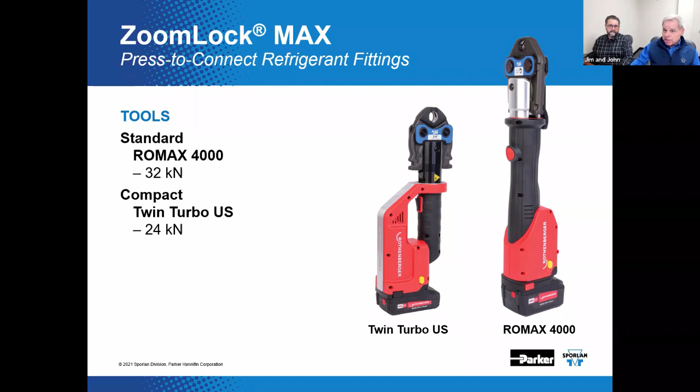Yeah. And as far as I know, Sporlan is providing these press tools. We maybe even have them in stock. We did. While we recommend utilizing the Rothenberger tools and jaws with the ZoomLock Max fittings, the jaws are available and compatible with a wide array of standard and compact crimping tools.

Now, if you're reading ahead over here, you'll notice that there's no crimp gauge required. How do we get away with that, John? No crimp gauge? We get away with no crimp gauge by having extensively tested the product, extensively validated the product and the crimping jaws, and proving that we do not need to gauge these. Wow. Well, that's a time saver there in and by itself.

Now look at this. We have the backing and the support of 60 plus professional sales and application people across North America. You know, some of those folks are even people that I've trained. That's kind of scary. Yeah. It is. That's scary. And you got to love this 10-year warranty.

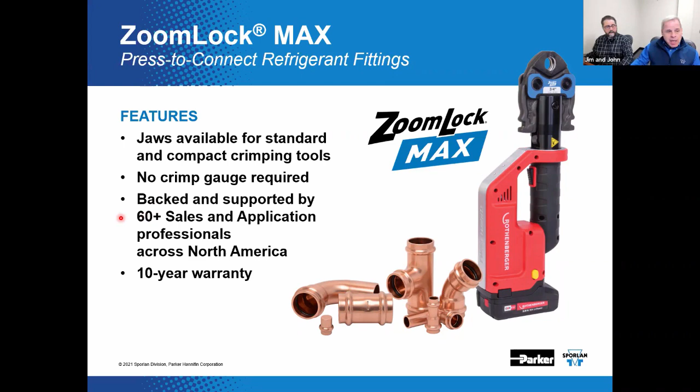Here's a new product that we're promoting as well, the ZoomLock Push to Connect refrigerant fitting. These are really quick and handy. You don't need a fancy, expensive tool to put them together. You just push them together. Push them together and they're connected. And again, as with the ZoomLock Max, there's no brazing, no flame, no hot work permit, and there's no need to nitrogen purge because you didn't burn it all to hell in the first place.

That's right. We have that same sales force supporting these products as well. And look at this. These are rated clear up to 870 PSI. That's pretty impressive. I've heard it's the configuration and the thickness of the brass and the incorporation of the grab ring that helps to gain that rating. That's correct. And John, are these UL listed?

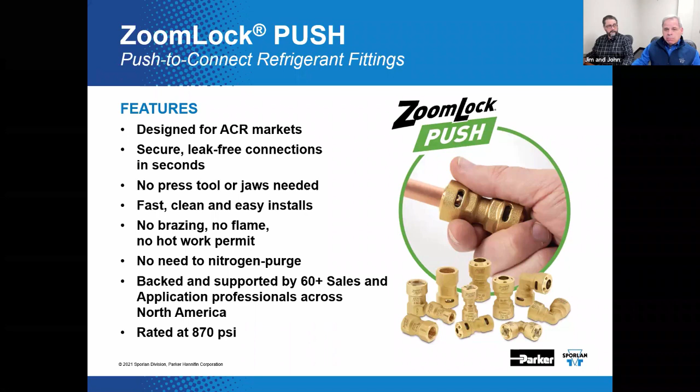Now, there's a 410A optimized designed version. We say it's non-removable and it's suitable for not only 410A, but a number of other refrigerants. It's got that 10-year warranty. And there's something about maybe you don't want to put a finger inside of here, or any other body part for that matter. Probably be advisable not to do anything like that. Yes. No, that's probably bad.

Now, we also have a so-called removable version. Boy, say that fast 3 times, removable version. I don't think I can do that. That's got a double O-ring in it. And apparently you can pull the little booger apart. They can be disassembled. How would you do that, John?

Well, we actually offer a nice little take apart tool. If you can see that, you get this little key set with these pull it apart tools. Refer to them as wrenches, though they're not really a wrench. They're just a release tool. Hey, yeah, it works. And so we're showing that you can buy those from us. Indeed. 10-year warranty here, 5-year warranty on this one.

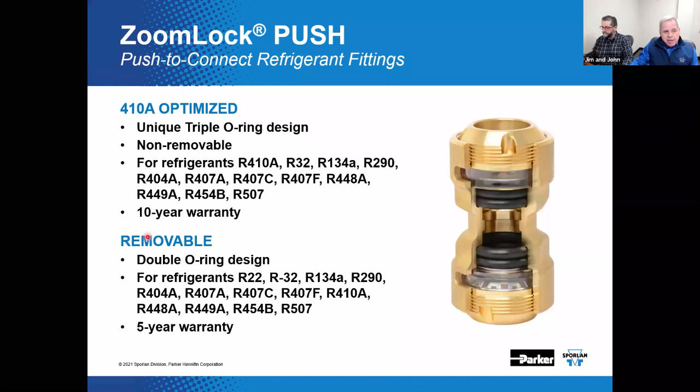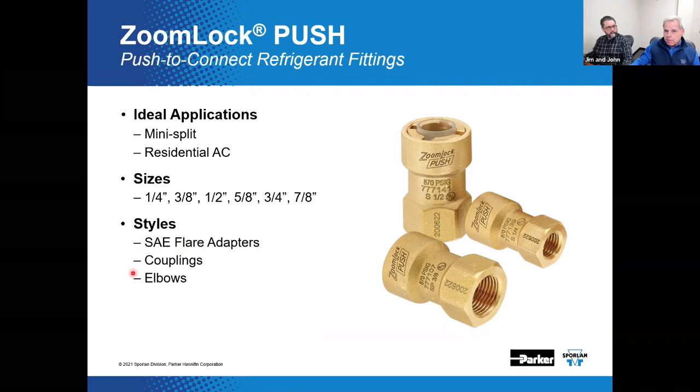And here's where these guys really come into play. MiniSplits, which are really susceptible to debris that could develop during installation. Correct. This helps to eliminate that. Residential AC, quick, fast, and a whole host of sizes here, right, John? Right. All the sizes you should need for those types of applications. And the types. Right. SAE flare adapters, couplings, elbows. And as you pointed out, having cleanliness is extremely important for the MiniSplits. Very, very important. Absolutely. And I think they might even be in stock.

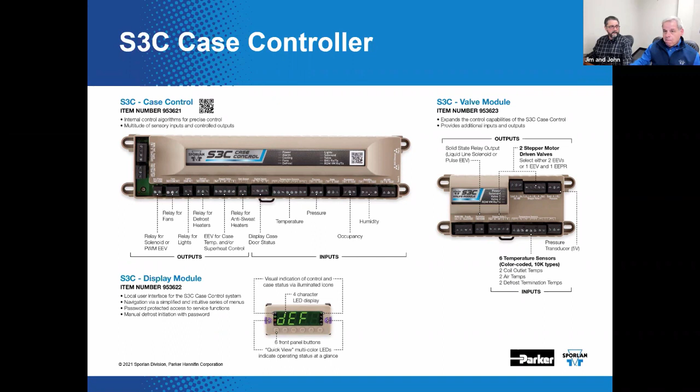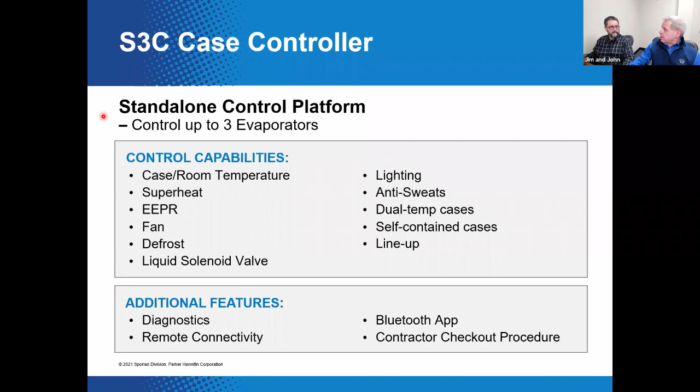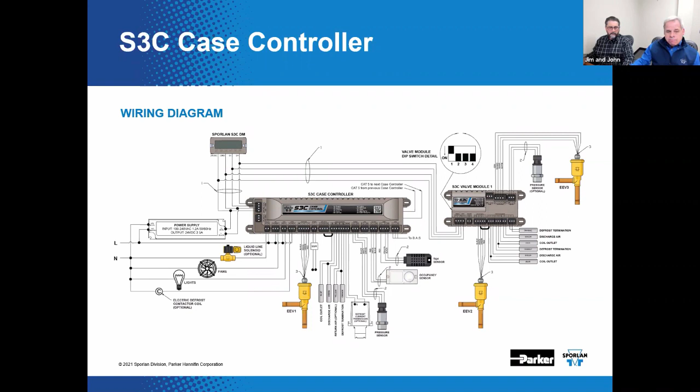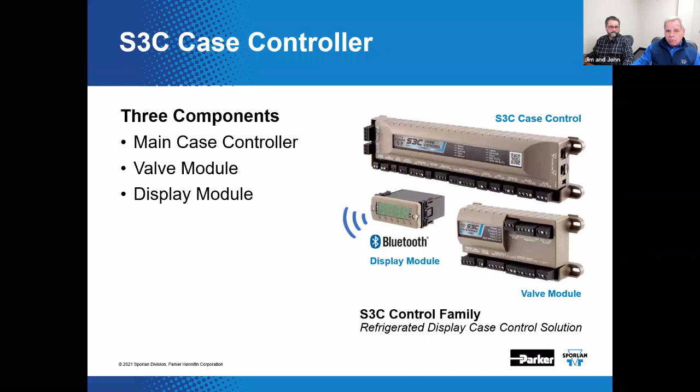Pretty neat. That's correct. And just a reminder, there's 3 components that comprise this complete package: the S3C case controller, the valve module, and the Bluetooth display module. Yep. Really neat. What the heck is this thing, John? And where do you get one? What does it do?

All right. So the reason for the Bluetooth is so that you don't have to go through and do all your function checks and setup through that little display module. You can, but you can also do it through a very intuitive app called Sporlan Tech Check, which is available for both Android and Apple devices. Oh, that's what this means. iOS and Android. Okay.

So where do you get this? You go to the Apple Store? Apple Store or the Google Play Store. So it'll talk to the S3C through the display module? Yep. Wow. Well, that's pretty neat.

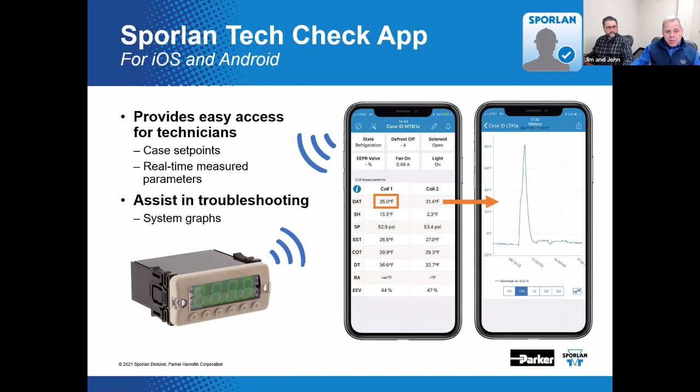This is slide 16, just so that Dennis knows.

Now, new product line. Modulating three-way valves, innovative solution to heat recovery and heat reclaim applications. Now, we've done this for a while, but we're expanding this product line in response to customer interest. We've increased the offerings to four different sizes. So we've got the 9 and the 17. Now we've got a 7 and the 21. Right. Expanding it both to the lower end and the upper end of the product range.

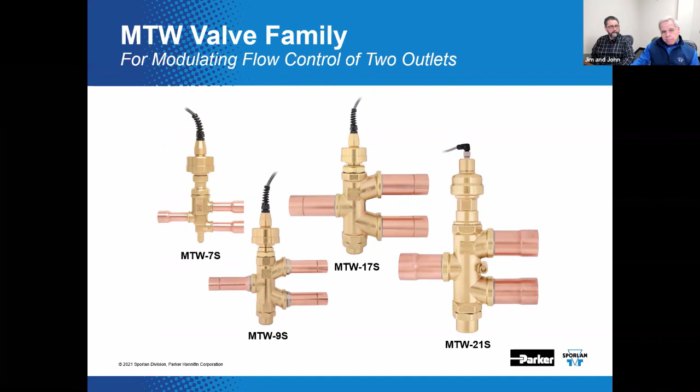And just so that you know, here's an example of how this valve could be incorporated into a vapor compression refrigeration system. Remember, there's 4 main components: the compressor, the condenser, evaporator, metering device, and then over here, here's where this modulating three-way valve could be utilized. Right. And then this is showing it connected to an interface board that's helping to tell it what to do.

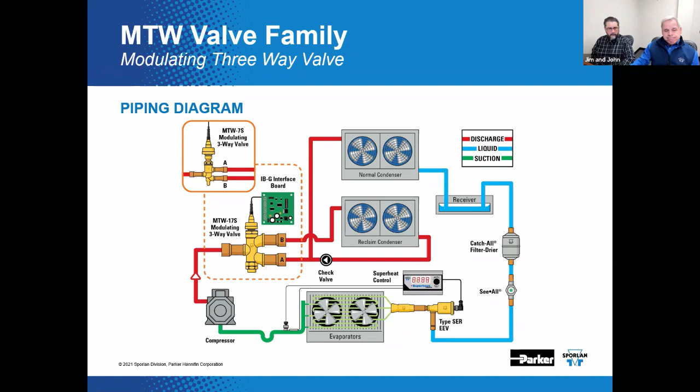These valves simplify applications and are ideal for modulating reheat or heat recovery. They're applications that we're seeing more interest in all the time. As an update to the product line, all sizes are now available in a serviceable form. Look at this. These things look like you can take them apart. Indeed, you can. The reduction in piping and controls and the complexity help customers implement modulating control in a more simple, compact way.

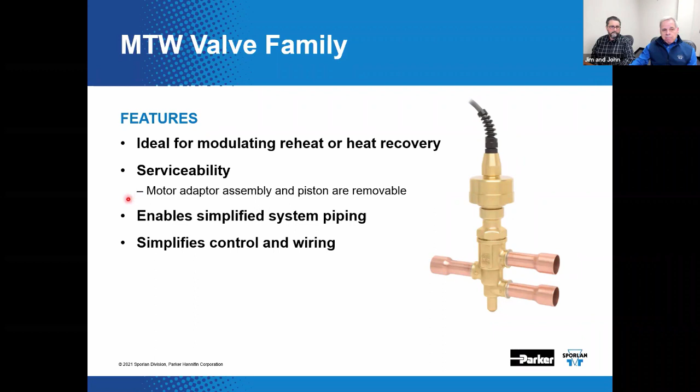What does this say? Motor adapter assemblies and piston is removable. I bet we've got a kit for that. We'll talk about that in a minute. Indeed, we do. So here's the new product sizes recently launched, support a broader range of sizes and support the expansion of modulating reheat, heat reclaim to smaller and larger tonnages.

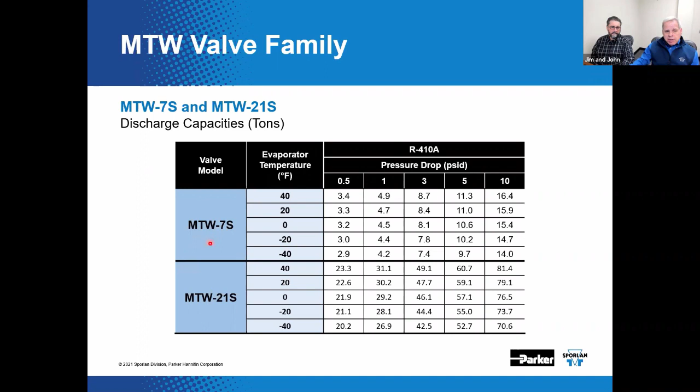You know what, John? I found a part number in here that was wrong earlier. You did, really? I fixed it, though. Yeah, I had help from a smart customer service leader help me fix that.

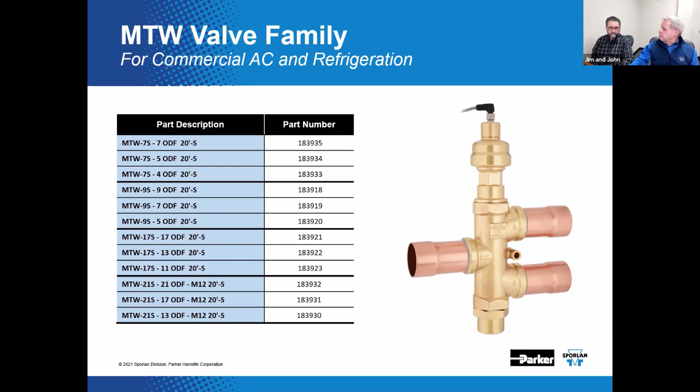We also offer the MTW service kit. That service kit includes a motor adapter assembly and a piston assembly. So we got a kit you can buy. That's something else we can sell to you. Completely rebuildable once the valve is in the system.

Sporlan has recently launched a new standalone control option, the Superheat Control System, or SCS-SB Step System Control. This is an electronic superheat controller solution designed for refrigeration applications using the step motor type expansion valve, an EEV. It's designed to be mounted within the refrigerated space for ease of installation on existing equipment, so it works well for retrofits. It includes a coil outlet temperature sensor and connectors for the step motor valve, pressure sensors, and electrical power.

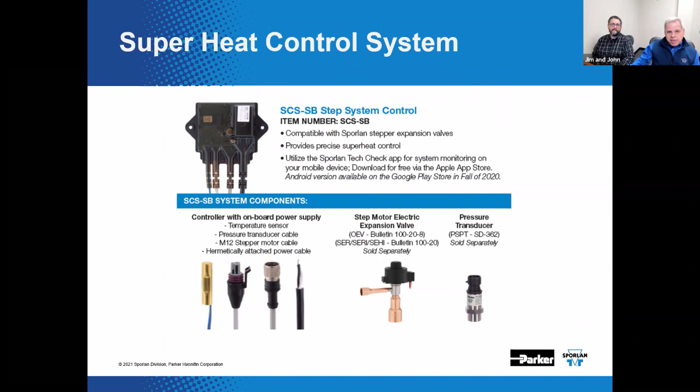What else? I bet it is also Bluetooth compatible. This has got that Bluetooth thing going on. That's just incredible, can't get away from that. This control package can accommodate both a pulse width modulating valve or a step motor valve alike.

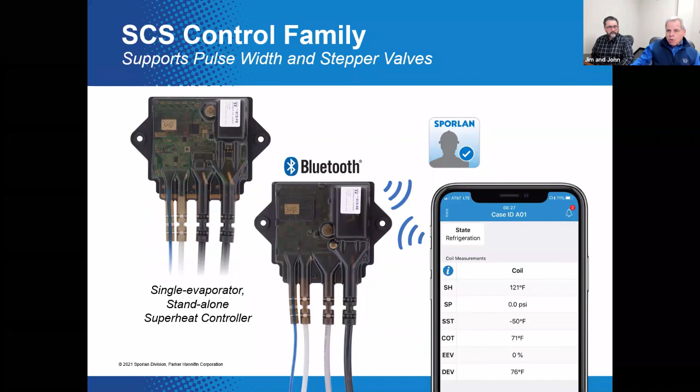Oh, what's this slide? This slide implies connectivity through that same Tech Check app that works with the S3C. It looks as though that Sporlan Tech Check app communicates with this SCS Superheat Control System in addition to the S3C. It does, indeed. What a deal.

If you were going to go down this path, that online training for the S3C would be beneficial. The online training will also help you with this.

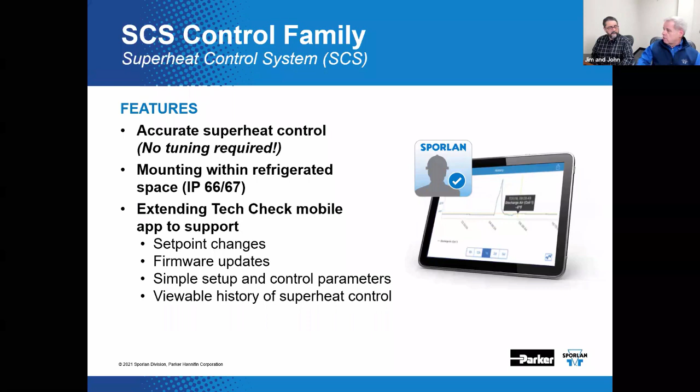Now, I don't get this one. Usually I activate stuff with a hammer. This is trying to tell me I can do it with a magnet. Yeah, you turn it on with a magnet? You may not want to use a hammer on this one. That's the hammer's for mechanical problems, and this is an electrical device.

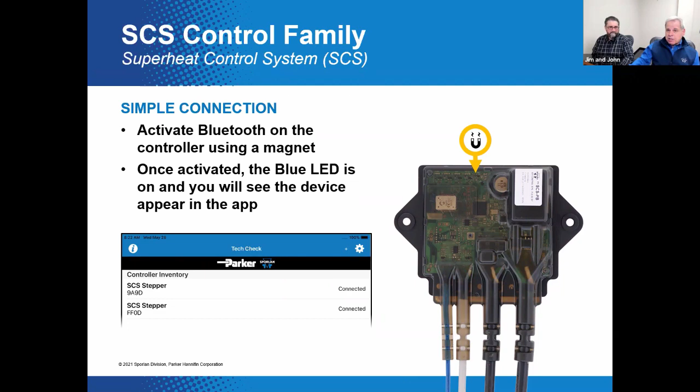So you activate the Bluetooth controller with a magnet. You touch a magnet to it, and that triggers it. That's what happens, and the blue LED is on, and you'll see the device appear in the app. That's just like magic, pretty cool.

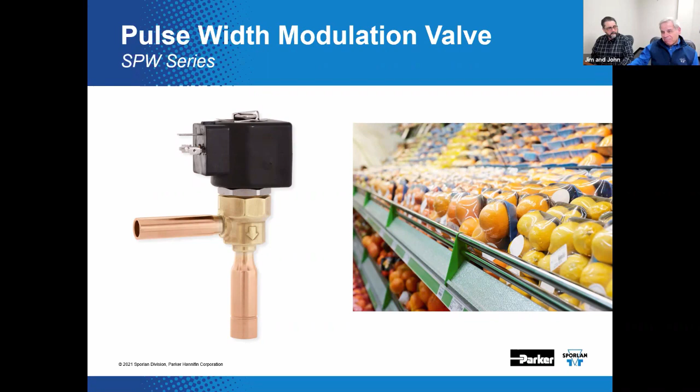We mentioned pulse width modulation just a little while ago. Really, pulse width modulation is a technique for control. So if we wanted to be rigorous, we would call this a pulse width modulating valve. It sounds a bit redundant, but I'll buy onto it. Fair enough. But we've got a robust series of products in this product line.

50 million cycles. That's a lot of cycles. I mean, that is many, many cycles. Somebody will probably ask us, how does that equate to years? And that's kind of tough to make that transition. But that's a long time.

It's because we know that contamination in a system is one of the single biggest problems that flow controls encounter. So having a serviceable design with strainers is a really beneficial thing. It also has interchangeable ports, so we can come up with different sizes and different capacities with this, tailored to quite a wide range of capacities.

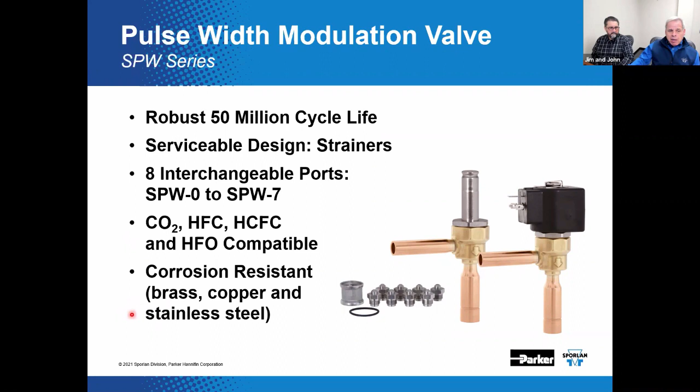And a wide array of refrigerants. What was old is now new again, things like CO2. We can handle HFCs, HCFCs. There's a lot of R22 out in the field, and it'll probably be functioning out there for a long time, and even HFO compatible. So these work with most any refrigerant you're going to encounter. Just about every refrigerant used out there today is compatible with these valves. And as you would expect, highly corrosion resistant, with brass, copper, and stainless steel construction in these devices.

So here's the pulse width modulation valve. As far as some specs are concerned, maximum rated pressure, it's not 1300, it's not 1310, it's 1305 psi. I guess that works out to be 90 bar. Maximum operating pressure differential, it'll stay closed at 507 psi differential, that's 35 bar.

The upshot of it is truly suitable for CO2 systems.

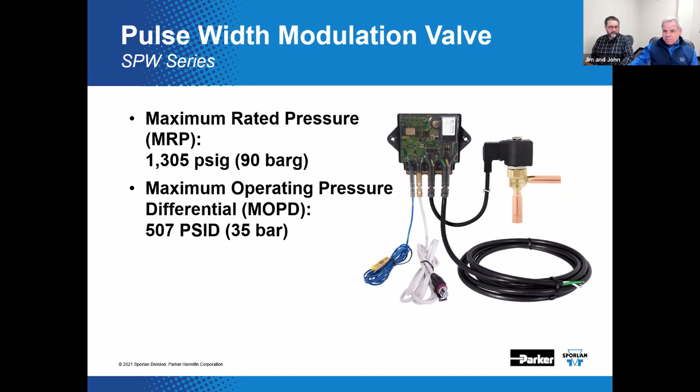Now here's some really neat features. It automatically sets up superheat. You don't have to go in. What's involved with dialing in a mechanical expansion valve? First you have to be able to access the valve readily. You might have to unload the case, out of the case, and you haven't even started doing anything yet.

You have to be able to get the adjustment cap off of it. You have to be able to get your measuring devices in place. You need a pressure measurement, a temperature measurement, and your handy dandy Sporlan PT chart to be able to do it. And you need some time. This does it automatically. You just plug and play, punch in the numbers.

Remote monitoring. Now, I bet that's limited. It is in this case. What's the limiting factor here, John? Pretty much the range of your Bluetooth device. Fair enough, but you can monitor it still without being in the case, so to speak.

Normally with a step motor valve, you would also have a solenoid valve in that line, needed for positive shutoff following a power failure. Correct. Now, since this valve is essentially a solenoid valve anyway, we got that covered. It'll close on a power failure. It will, yeah. And it's easy to troubleshoot.

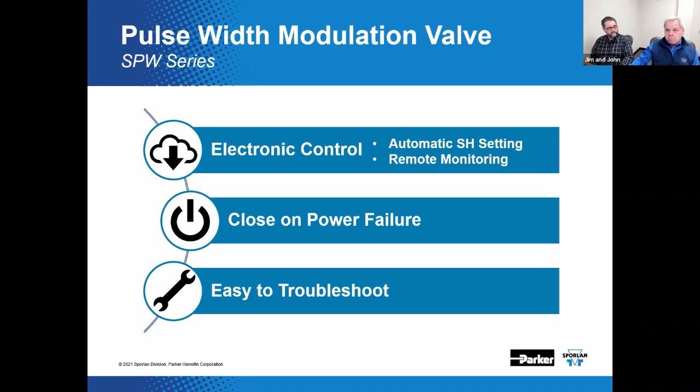Very easy. And if you find that you can't get to the root of it, we still have humans here in Washington, Missouri - Sporlan Tech Support. We're always here to help you. Humans that are actually very good with all things refrigeration system and very much with all of our products. That is a neat support thing that we do.

Now, here's another product. It's been around for a little while, but we thought it deserves some attention. It looks pretty much like this EEV with this serviceable inlet strainer, has the fancy dancy little mesh stainless steel strainer. Well, I don't know if that's the exact part number, but it sounded good. It sounded like I knew what I was talking about.

Very much so, yeah. Now, this is a serviceable strainer, but a word of caution - I think you'd need to isolate this valve from system pressure in order to remove this strainer and not have a de maximis leak. That's always a good idea, yeah.

Now, the capacities of this valve are similar to the traditional SER capacities. In other words, a double A port, like we're saying double A port here, that's a little over a half a ton, half to 3/4 ton, depending upon the refrigerant and the conditions. And the C port's going to be, I don't know, 7 to 8 tons. Again, same kind of deal - what refrigerant's flowing through it, what are the conditions. 2,500 steps of resolution. I think we've tested the dickens out of these.

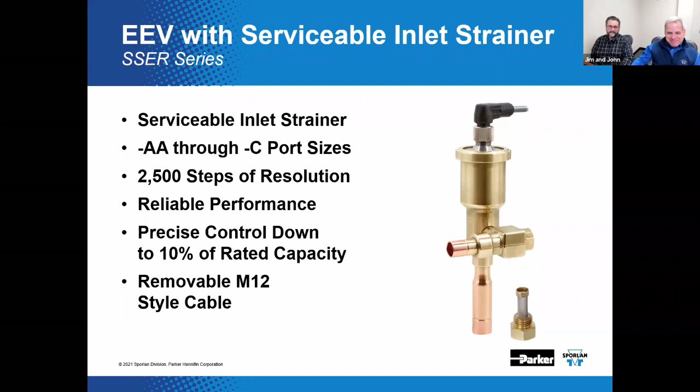And this is pretty neat. It has that M12 style cable. That means we can take this cable off. We can remove it. But you know what's really cool? You can actually put it back on. Most all of our cables, you can take them off the valve, but you might not get them back on. That's right, this one's designed to do both. That's awesome.

Unipolar electric expansion valves, the OEV series. Unipolar versus bipolar - ordinarily I'd have something cute to say about bipolar, but I'm not going to do that. Why unipolar construction, John? In this case, it all depends on the control scheme that the control designer wants to implement on their boards. There are certain controllers that control designers like, and it helps them provide a better balance between performance and cost. This gives them a choice.

Absolutely gives them a choice. I mean, I guess most of our traditional valves in the Sporlan lineup are bipolar, right? That's correct, or bipolar, yep. And this thing has a so-called dry stator. Can you take this off without isolating the valve from system pressure? Yes, you can, because it is not part of the sealed system.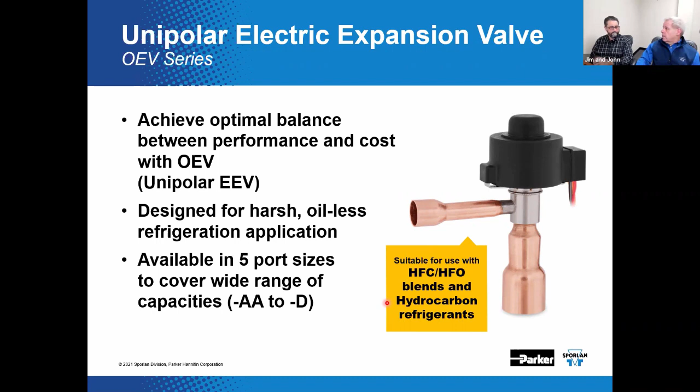Here you see the EEV, known as the OEV series of unipolar electric expansion valve, for refrigeration and light commercial air conditioning applications. We've got a bearing design for, I think you already said this, oilless applications.

I guess I got ahead of myself. You are behind me, or ahead of you, something like that. The capacities are similar to the SER AA through SER D electric expansion valve capacities. What does that mean, John? Do you have any idea about what that is?

What's a double A port? The double A port is maybe around the half to 3/4 ton capacity range. And if you go up to the D port, it gets up to around 12 to 13 tons. That, of course, is dependent upon the refrigerant and the conditions, but that's just a general guideline.

And of course, in between there, you also have A, B, and C ports. Gotcha. So you have several choices there to get an optimized selection for the valve.

And it looks like we go clear up to maybe 15 tons if we're talking about R410A. That makes sense — high capacity, high pressure refrigerants, you can get that little extra capacity. Absolutely. An innovative needle design for consistency and high cycle life. That's a good deal. It is.